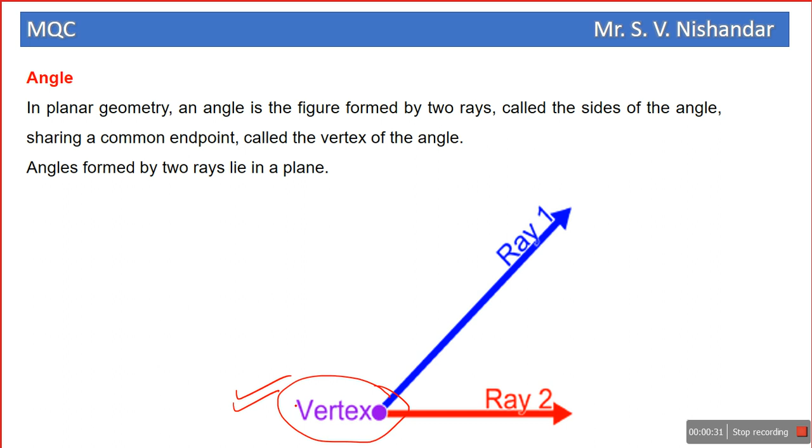This is the angle. If you see, a circle is divided into 360 parts, and each part is called a degree, and each degree is divided into 60 minutes, and each minute we can also divide into 60 seconds. Another unit of measuring angle is radian also. This is some basic fundamental.

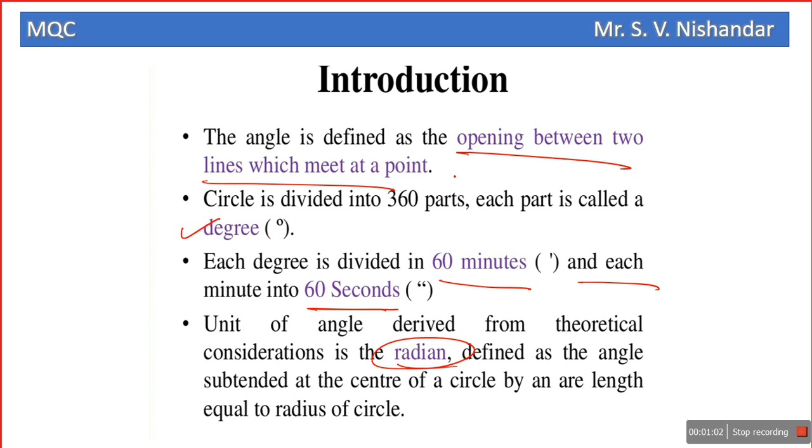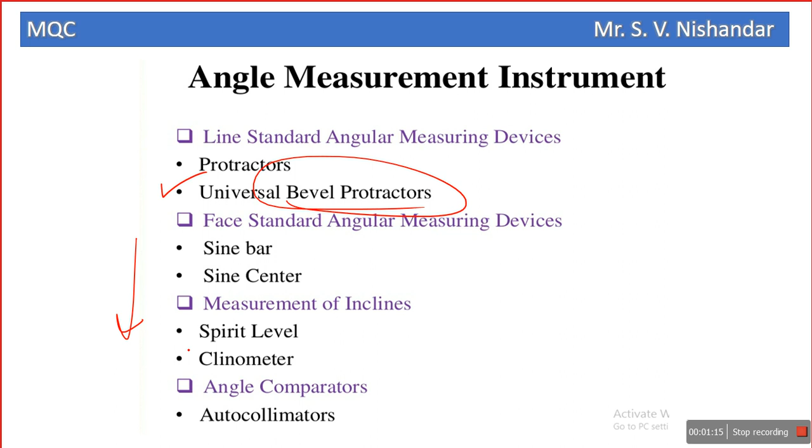Some students don't know the definition of angle. If asked to define angle, simply it is the opening between two lines which meet at a point. Just remember this. There are different methods of angle measurement with different instruments. Today's lecture we're going to focus on the bevel protractor, and in coming lectures we're going to discuss all the different types of instruments.

So let's start with our vernier bevel protractor. Why is it called vernier? Because for measuring angle, we use the same phenomena. So how do we read? There is a main scale reading: main scale reading plus vernier scale reading into least count. So we measure this angle with the help of the same phenomena like the vernier caliper, the same formula here: main scale reading plus vernier scale reading into least count.

So if we see this bevel protractor, this is quite different as compared to the vernier caliper. If you see this construction, at first look it looks complex, but it's very simple. When you come to the next slides, you can easily understand. See, this is one scale, one dial, a circular scale, and that part is the base. This is a continuous single part. One circular dial is provided, extended with the blade.

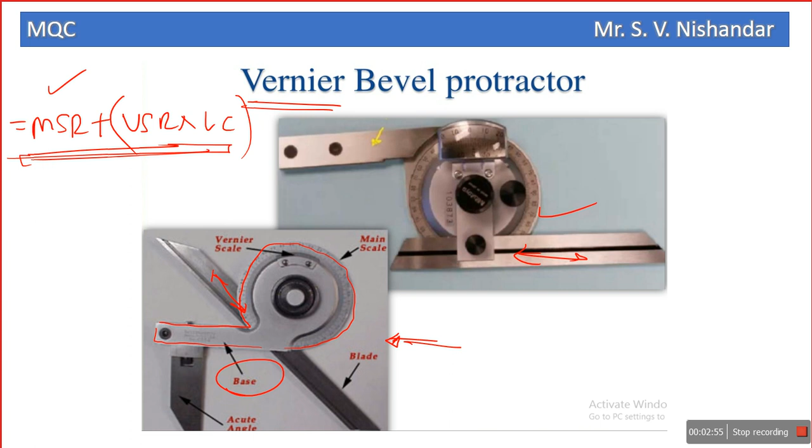Sorry, it is provided with the base. And over that dial the blade also slides in the slot. If you see here, this blade can slide or rotate over this dial. And the base is an integral part of this dial. Then why is such a construction provided? Before going to the detailed construction, just go through the applications directly.

See, this is the blade I already told about, and this is the base. Which angle are we going to measure? First we have to rest the surface with the help of the base. Suppose this angle we have to find out. Over that surface we attach the blade. We just slide the blade over the surface of the workpiece, so we can measure this angle.

This is a circular scale. Part of the circular scale is the base. The base is rested on the surface, and on the side of the surface whose angle we are going to measure, we rest the blade. So you can measure this angle. Now this is the main scale reading, and if you see over the dial, one scale is provided, called the vernier scale. And a lock screw is also provided here, like the vernier caliper.

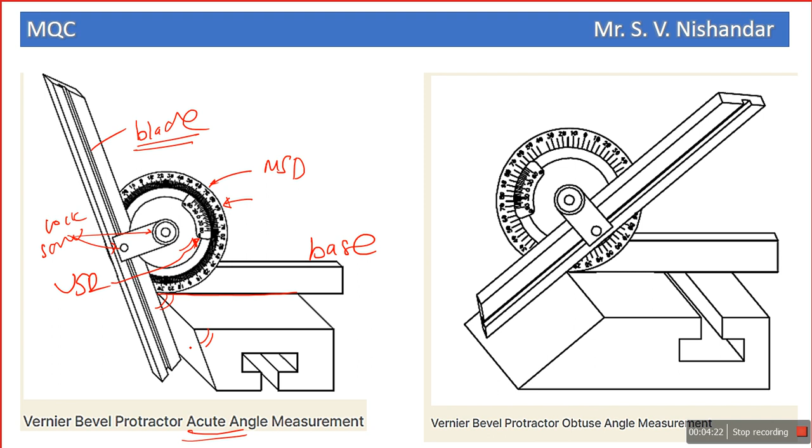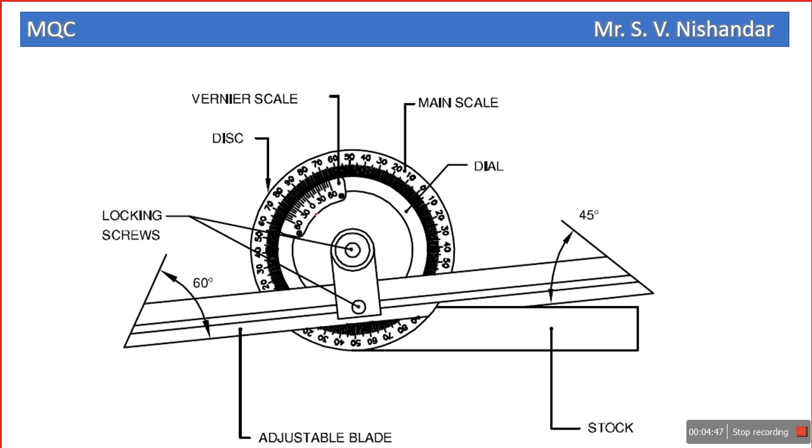So acute angles we also measure with the help of the bevel protractor. If you see here, the angle is more than 90 degrees. Obtuse angles we also measure with the help of the bevel protractor. So how to read? If you see this provision here for measuring acute angle, there is one arrangement provided for the resting purpose. See this attachment. For measuring the acute angle, one accessory is provided. To the base we have to attach this accessory for acute angle measurement.

If you see this application image, suppose this is a workpiece and we have to measure this angle. The workpiece is shaped like that, and we have to measure this angle of the workpiece. So the acute angle attachment is provided over the base. We rest the workpiece. The shape of the component you see here. This is the shape. And you have to find out this angle for that component, find theta. So rest this base with the accessory and you can measure this angle.

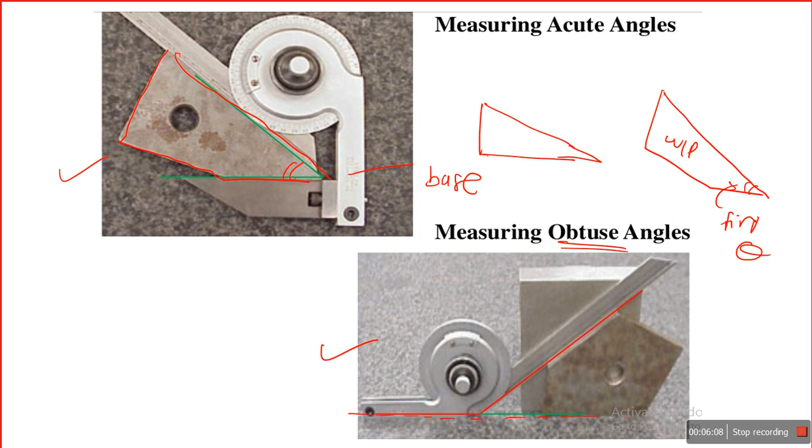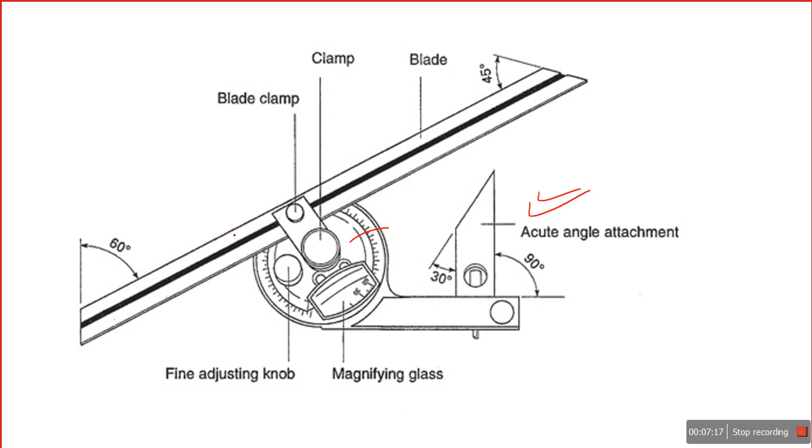Now we discuss the very important part, the measurement. Many students fail to read this bevel protractor. So let's start with this very important part. For the ICA activity it is very important. So the coming 5 to 10 minutes are very important: how to read this bevel protractor. So see, the first thing is very important.

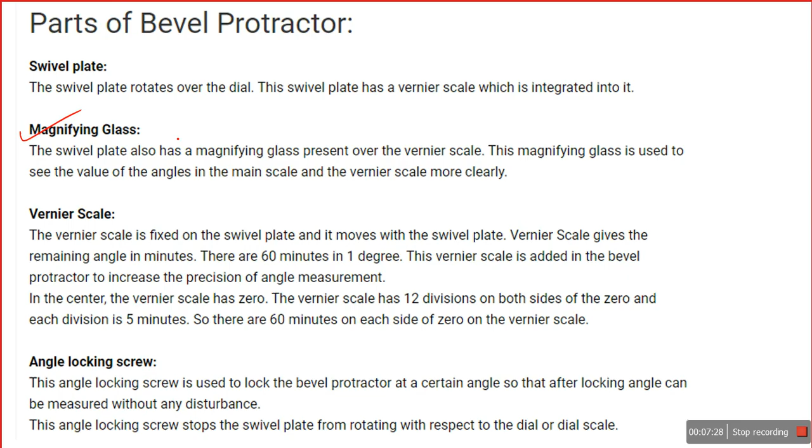Okay, there's one more thing. Okay, before starting, I am going to explain. If you see, the graduated scale is a prominent dial. So for the main scale reading, the minimum measure with the help of the dial is 1 degree. There are 360 degrees, and the minimum distance we can measure with the help of the main scale is 1 degree.

And the total number of divisions of the Vernier scale are 12. If we see this Vernier scale, this is 0, and on either side of the 0 there are 12 divisions. So first we find out the least count here. How do we calculate the least count? The minimum distance on the main scale is 1 degree, divided by the total number of divisions on the Vernier scale. So take the total number of divisions as only 12. Why is it important on both sides? While measuring the reading, I will come to that point.

So the total number of divisions on the Vernier is 12. The ratio of degree to minute is not possible directly, so you have to convert to the same unit. So 1 degree into 60 minutes divided by 12. So the least count of the Vernier is 5 minutes. The 5 minute symbol is only one dash. So 5 minutes.

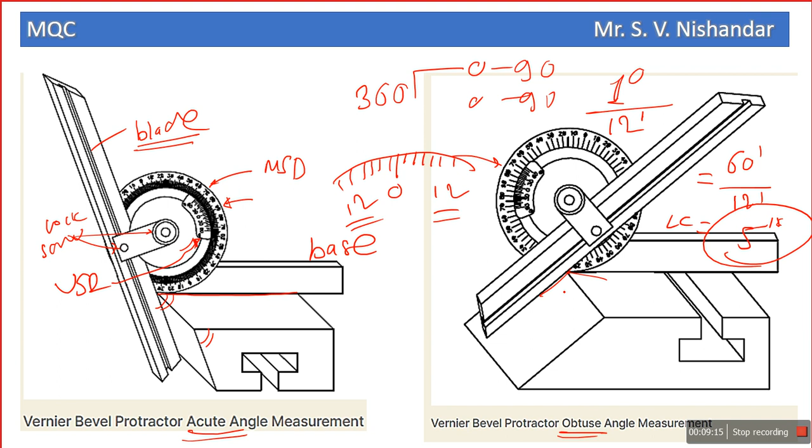Now the 360 is divided in 4 parts. How do they divide into 4 parts? 0 to 90, 0 to 90, like that over the scale. So depending on which angle we are going to measure, acute or obtuse, there are different possibilities while taking the reading. So the first possibility of the reading, see here, I am going to discuss.

If we see the Vernier, on both sides of this 0 it is divided in 12 parts, and each line is 5 minutes. This is the least count. So each line is 5 minutes: 5 minutes, 10 minutes, 15 minutes, like that, up to 60 minutes. That is 1 degree. So 1 degree is nothing but 60 minutes, and each part is again of 5 minutes. So this is the least count of the bevel protractor.

Now reading, how to read is very important. I am going to take the reading now in clockwise. Some students are confused about why we take clockwise, why not anti-clockwise. Because if we see, the scale here is increasing 10, 20, 30, 40 like that. The Vernier 0 is here. Near the 0, which line of the main scale is closest? The distance between two lines is 1 degree. So 21, 22, 23, 24, 25, 26, 27 and 28. This line is closest to the 0 of the Vernier scale.

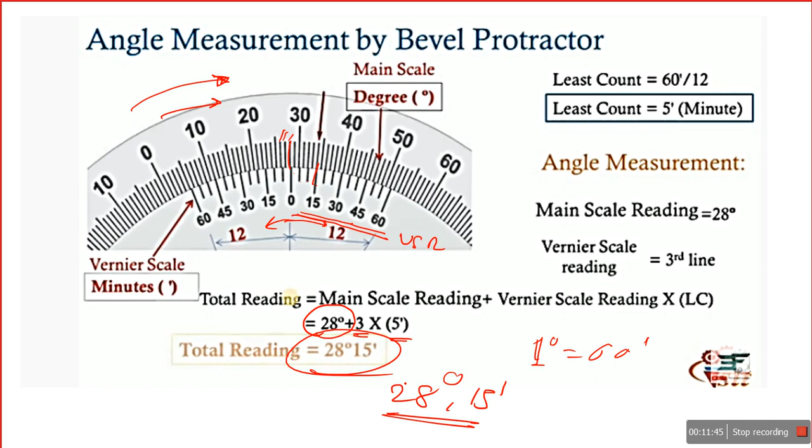Now see which line matches. If you see carefully, the third line of the Vernier is matched with the main scale. So the third line matches and the least count is 5. So the reading is 28 degrees 15 minutes. Now take another example.